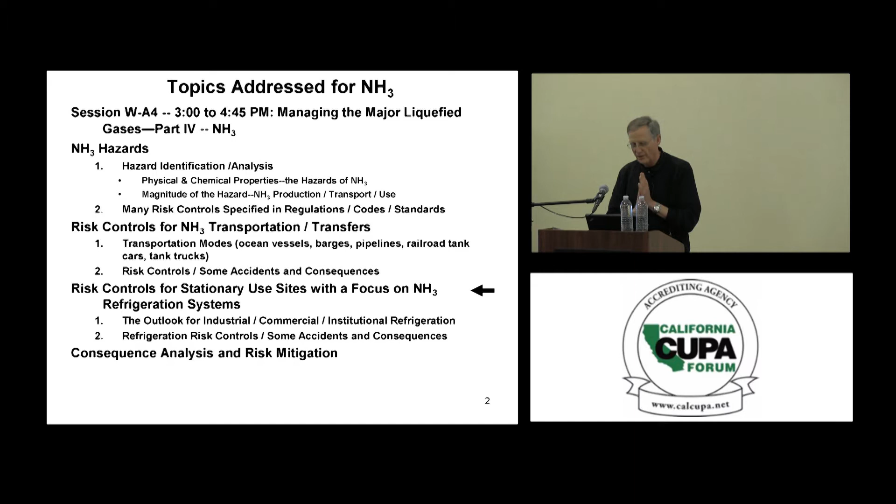For those others, we've talked about propane and chlorine. Ammonia is a very large tonnage, 135 million tons per year globally, about 16 in the U.S., fluctuates up and down. In the U.S., we are going to be back in the business of producing more ammonia here in the States. And why is that?

You want to volunteer the answer? Well, there's demand, but there's something else that has changed: feed gas. Feed gas being methane, which is how you make ammonia. You use methane as one of the key materials.

I am sorry, I thought I turned it on. So one of the reasons we're going to start producing more ammonia in the United States is because we've got a lot more methane, which is a key ingredient.

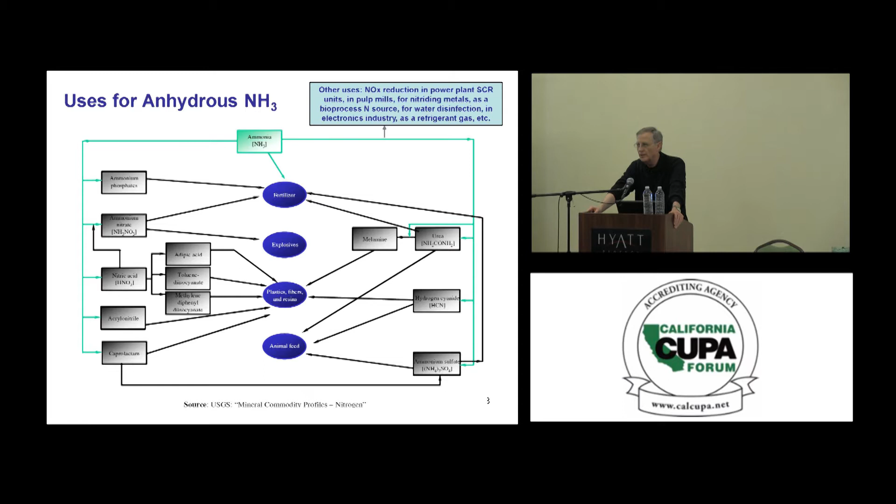We have been importing a lot of ammonia into the U.S. from low-cost producers of natural gas offshore, where they essentially had stranded gas. They had no other way to get rid of it other than producing another product, and ammonia was a shippable product that could be shipped much more easily than liquefied natural gas.

Ammonia has a number of characteristics, and I want to offer the advice I gave in the chlorine section: there are many industry associations that can provide a much better summary than I can of all the properties of ammonia and other gases. Here is one, the anhydrous ammonia training tour by TRANSCAER and the Fertilizer Institute, and I'll show a couple of clips. If you go online, look for TRANSCAER, the American Chemistry Council, the Fertilizer Institute. They give training courses on emergency response, as well as have a lot of online information about how to handle the risks associated with ammonia.

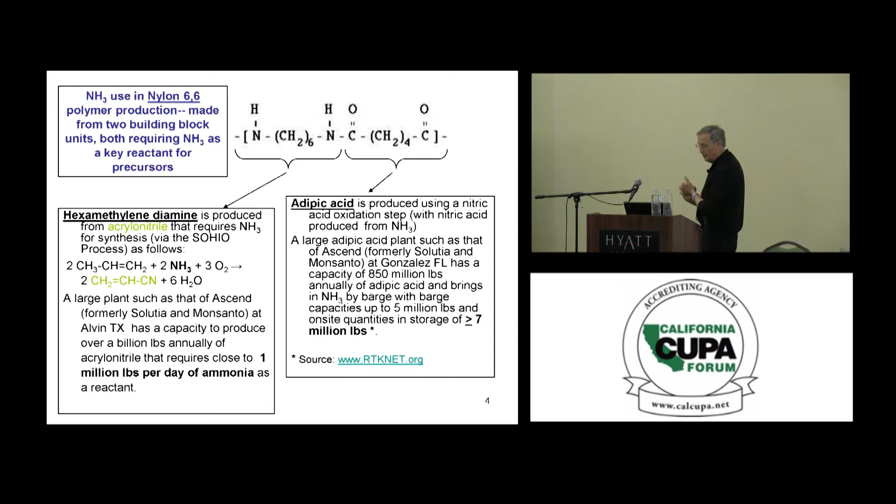In this discussion of ammonia today, I'm going to talk about hazards, risk controls in transportation, and like in the case for propane, ammonia gets transported by a lot of different means and in a wide variety of quantities depending on the transportation mode. Then we're going to talk about risk controls for stationary use sites, and about a lot of different ammonia uses, but we're going to focus on ammonia refrigeration because that is by far the largest single user, and certainly in California.

Commercial ammonia products - we talked a little bit in the last session about inherently safer approaches. There is some confusion at times when people talk about ammonia and aqua ammonia. Ammonia is anhydrous ammonia, and aqua ammonia is ammonium hydroxide. Commercial grade anhydrous ammonia is actually not completely dry, but it's pretty close, though it does have a certain level of moisture in it. Two common commercial grades of aqua ammonia are roughly 30% and a little under 20%.

There are great differences in the physical properties between anhydrous ammonia and aqua ammonia that have a very significant impact on the safety and use and storage between the two. So if there is an opportunity to cost-effectively - first it's got to be technically feasible, but then if it's cost effective - to use aqua ammonia, ammonium hydroxide, there are some real safety advantages in terms of risk management to using aqua ammonia instead of anhydrous ammonia.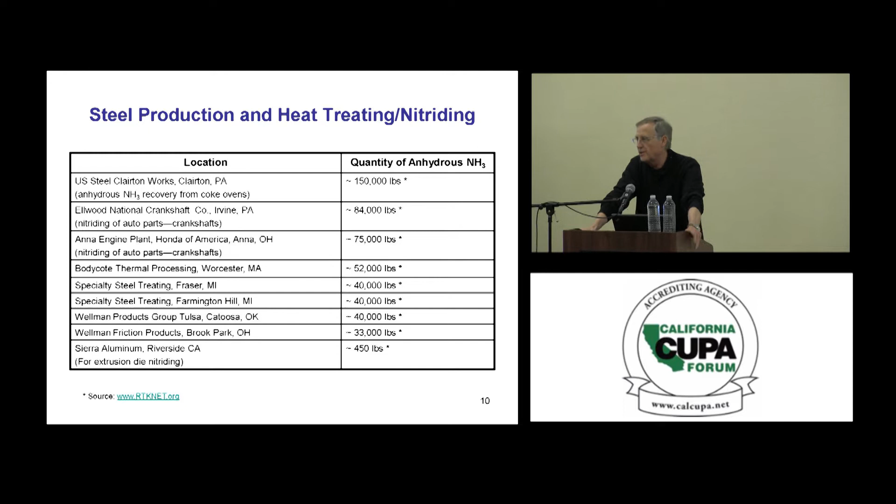Within a plume from a release from an ammonia refrigeration system, we're talking about in-plume concentrations that could easily be in the 50 to 150,000 part per million range. So going into an ammonia release plume can be very dangerous to your health.

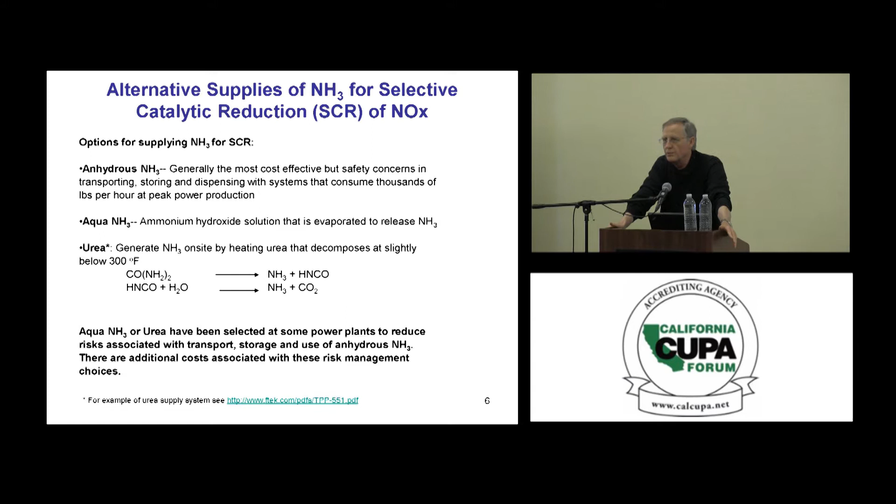Let's go back and talk about that number on vapor density, 0.6 relative to air. So you'd think ammonia is going to go up. Well, it will eventually, but as we'll talk about in the consequence modeling, it's not going to at first. It depends on how soon it's going to go up, where it's released, the conditions for release, the height, the pressure, the temperature, whether it's liquefied ammonia from an atmospheric storage tank or pressurized ammonia, and where it is in the system. If it's on the hot side or cold side of the system makes a big difference.

How many of you are with regulatory agencies, either Cal EPA, CUPA, etc.? Most of you, how many are in the audience? How many are here from a user of ammonia for ammonia refrigeration? One, two. Okay. Was that a hand in the back? Three? No, okay.

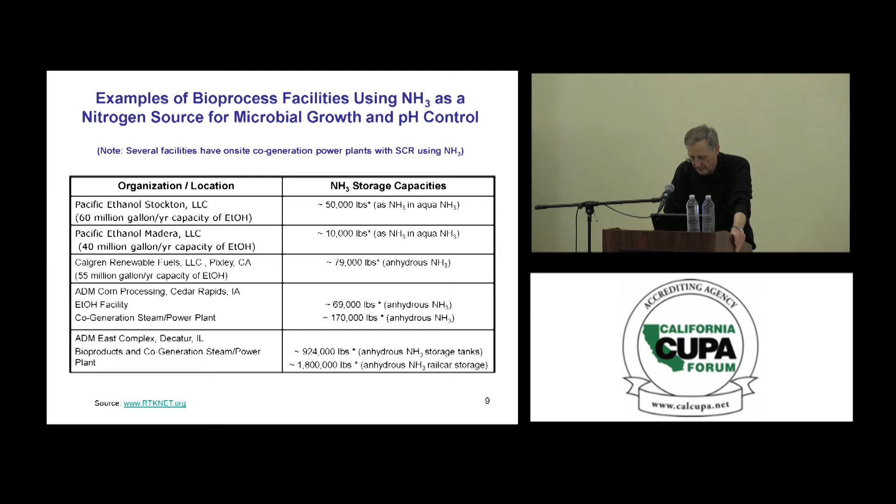So when you go by West Sacramento and look at those big tanks, or in Stockton, Port of Stockton, what are those in terms of ammonia? Does anyone know? There are some bullets, but there are also some atmospheric storage tanks that have a lot of ammonia in them.

And the big storage tanks operate at minus 28 degrees Fahrenheit. Why is that? Because it is much cheaper to store liquefied ammonia at atmospheric pressure in very large tonnage quantities. So those vessels are at minus 28 degrees Fahrenheit. We're going to talk about BLEVEs a little later, so remember that temperature in that vessel, it is at its atmospheric boiling point. That's the answer to the question I'm going to be asking you.

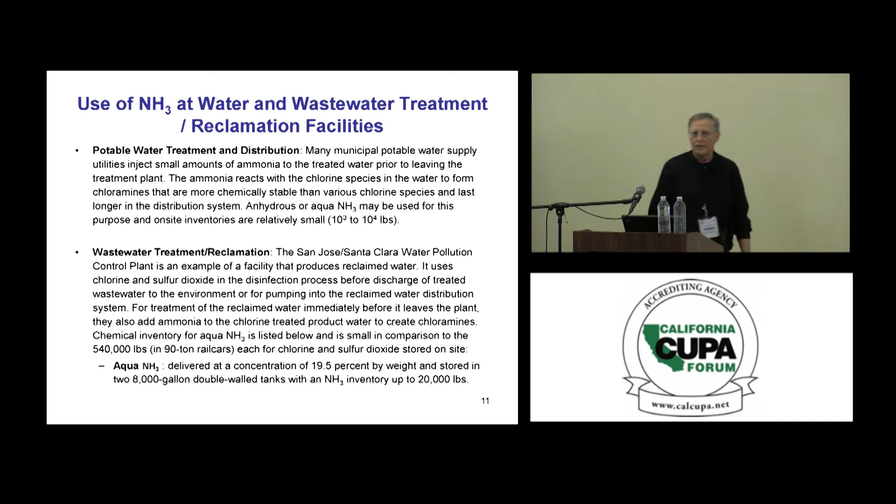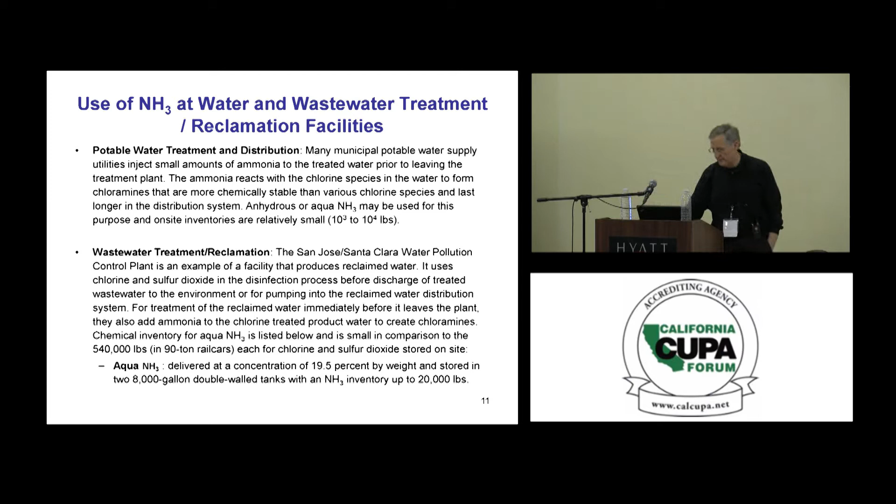If you spill aqua ammonia, there's much less of a cloud of ammonia gas formed, so you have much less off-site consequences compared to anhydrous ammonia. It's still not pleasant to be around 30% aqua ammonia, believe me, but it's a lot less of a hazard.

Now, BLEVEs: the ratio of how much gas volume there is to liquid volume if you have a sudden expansion. This is a rapid phase transfer. It's 850 to 1 for ammonia, so for every cubic foot of ammonia in that tank, you'll get 850 cubic feet of gas. If that expansion happens very quickly, it's called a boiling liquid expanding vapor explosion, and those are extremely hazardous.

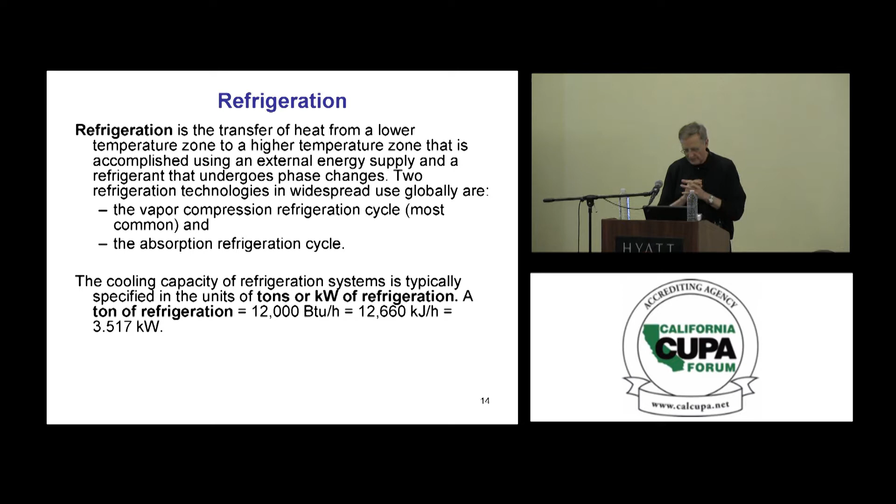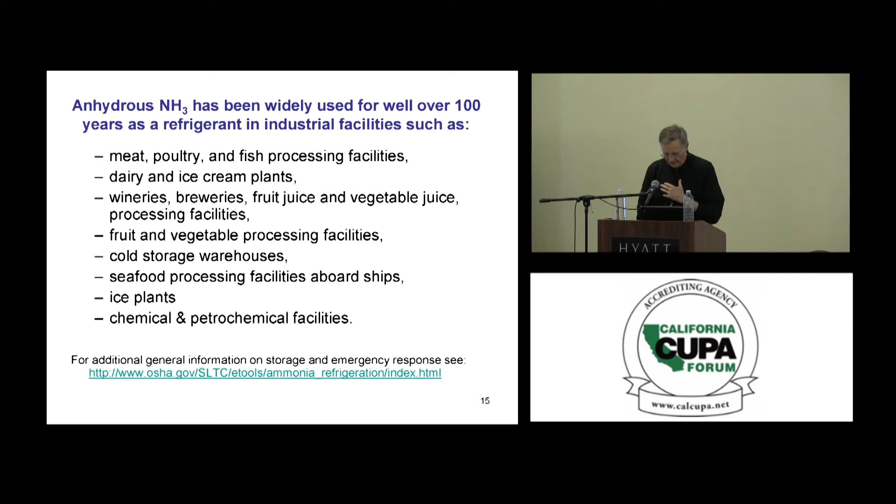One of the key properties that makes ammonia such a good refrigerant is a high latent heat of vaporization. Not as good as water, but it's good, 600 BTUs per pound, 6/10 of what it is for water. It has very good heat capacity too. But these small releases of ammonia from a refrigeration system, 1 pound of ammonia released can provide a significant volume to get up to a level where you could easily smell it.

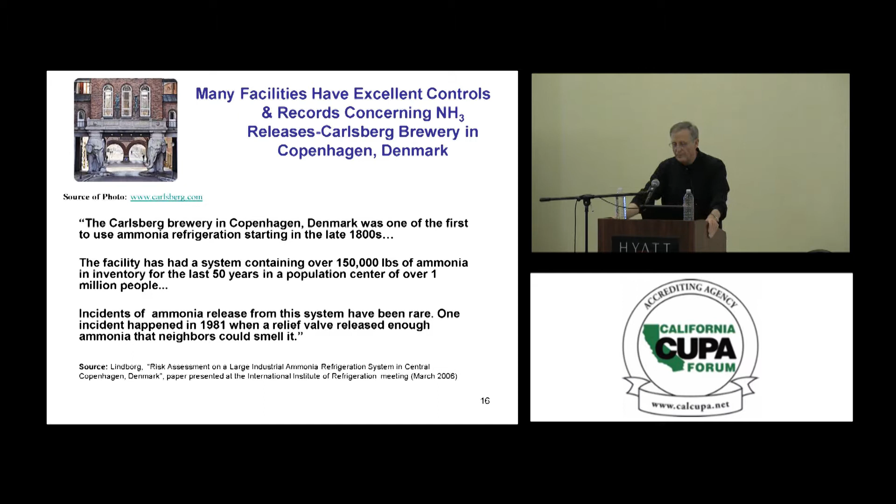So you discharge 100 pounds of ammonia out of your ammonia refrigeration system, out of your storage tank for distribution to on-farm use, and you can contaminate a gas volume of 90 million cubic feet to a concentration of 25 parts per million. That's 100 feet of air depth over 4 city blocks.

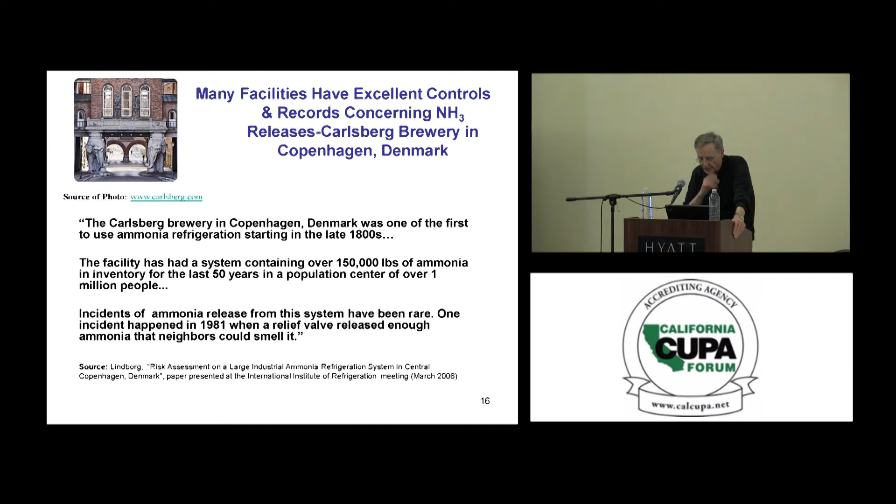Now, will that 25 parts per million hurt anyone? No. It will not be something people will enjoy, but 25 parts per million is the acceptable level for exposure for long-term work environments. Now, let's talk about another physical property of ammonia.

Ammonia has been considered as an alternative fuel, an alternative liquid fuel. I don't know how many people knew that. It's not a very good idea, in my opinion, because you have to get hydrogen from someplace, which typically comes from natural gas. Now, if you could generate the hydrogen from a nuclear power plant and then react it with nitrogen in the standard process, maybe you could make an argument, but I can't see that as being very cost effective.

But the point I want to make is ammonia will burn. Ammonia is an explosion hazard, but it's much less so than for the fuel gases, for a couple of good reasons. One is that most hydrocarbon gases have lower and upper explosion limits in the range of 2 up to maybe 13 or 14%. Ammonia's range is from 15% to almost 30%.

Also, minimum ignition energy: once you get a flammable mixture of a flammable gas such as methane, ethane, ethylene, propane, and so forth, the ignition energy is very low, 0.25 millijoules. The ignition energy to set off ammonia is 680 millijoules. This is the reason why in the fire code there are special provisions for not having certain electrical classifications, and some options when you have ammonia, since it's not treated as a flammable gas. The LEL I mentioned.

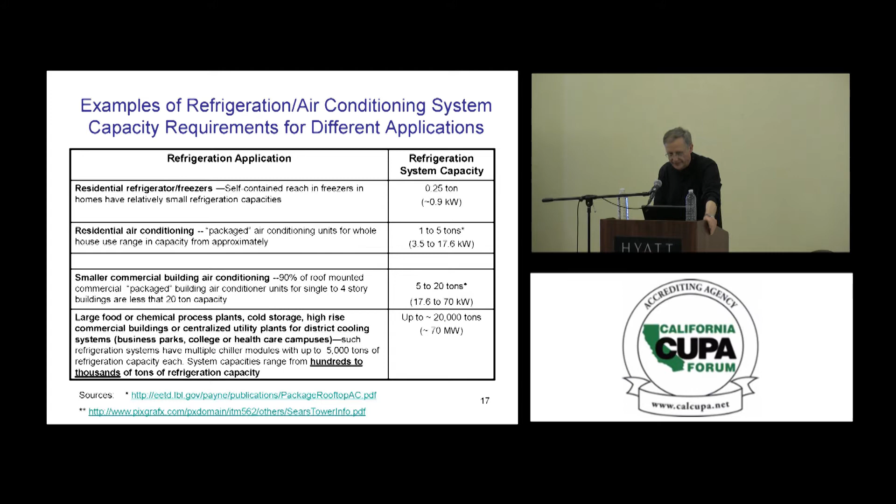Once we produce the ammonia, we have to transport it. Ammonia gets transported by many ways. It is a major item of commerce around the world and gets shipped by very large ocean-going vessels that go through under the Golden Gate.

On the west coast of the United States, there are 3 terminals. 2 of them are in California: one is the Port of Stockton, the other is the Port of West Sacramento, and the other is the Port of Portland, Oregon. They bring in huge amounts. The largest place in the United States for bringing in is the Port of Tampa, which has 3 very large terminals. So we'll talk about relative magnitude of the hazard in ammonia in a moment.

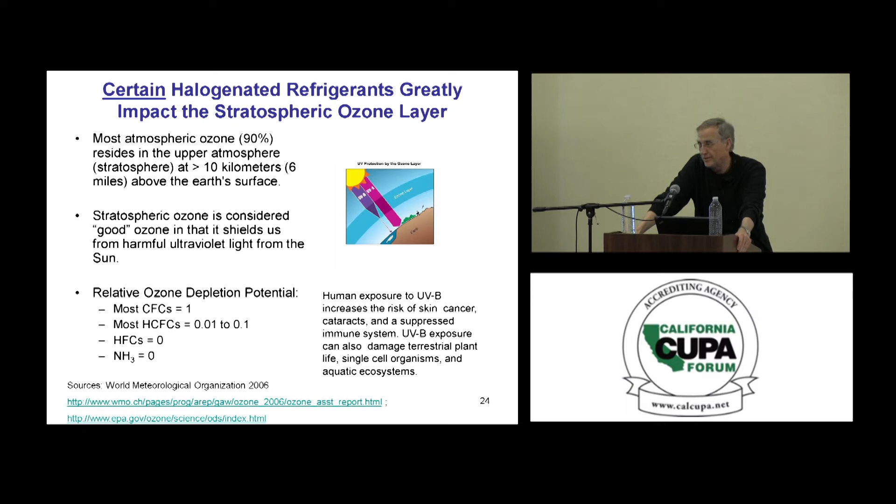Big number, big hazard, big risk exposure. When we talk about relative risks and the magnitude of the hazards, you have to look at quantities. Large bulk storage terminals typically are 10 to the 8th, 100 million pounds. Ammonia synthesis, often co-located with nitric acid plants, is 10 to the 7th to 10 to the 8th pounds, 10 to 100 million pounds. Large chemical plants converting ammonia to non-volatile fertilizers are 10 to the 6th to 10 to the 7th. Local distribution centers and small fertilizer plants are 10 to the 3rd to 1 million pounds.

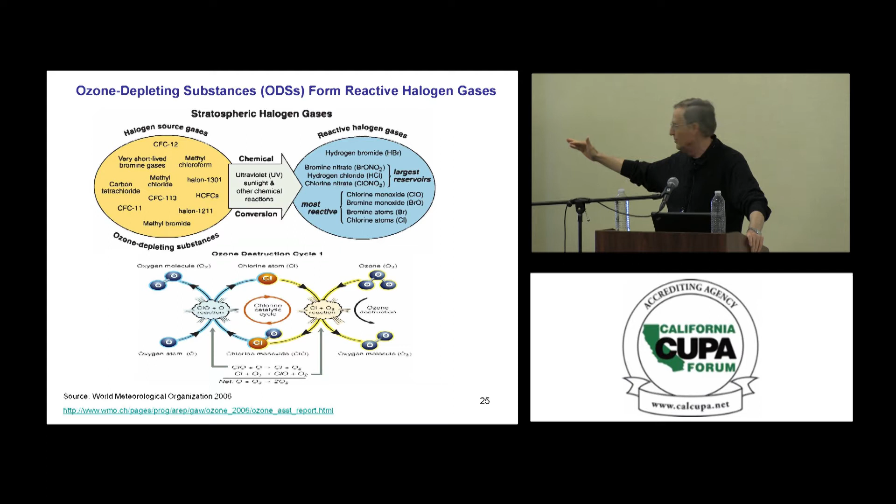The reason I'm making this point is this: as a society, as professionals in chemical, mechanical, and electrical engineering, and control systems, we have been able to do a very good job, for the most part, in controlling very large quantities of ammonia. So when you tell me that you have a system in California with 500 pounds of ammonia, does that tell me that's trivial? It does not—that is still a significant risk exposure, perhaps. But what it does tell me is that we have a lot of experience handling many orders of magnitude. These aren't just factors, these are orders of magnitude, orders of 10. So we've got a lot of experience to leverage to manage ammonia risks very successfully.

How is ammonia transported? Ammonia is transported across the U.S. by a number of means. There are a lot of import terminals, and historically the sources of cheap natural gas have been the Gulf Coast of the United States, where most of the ammonia production has occurred.

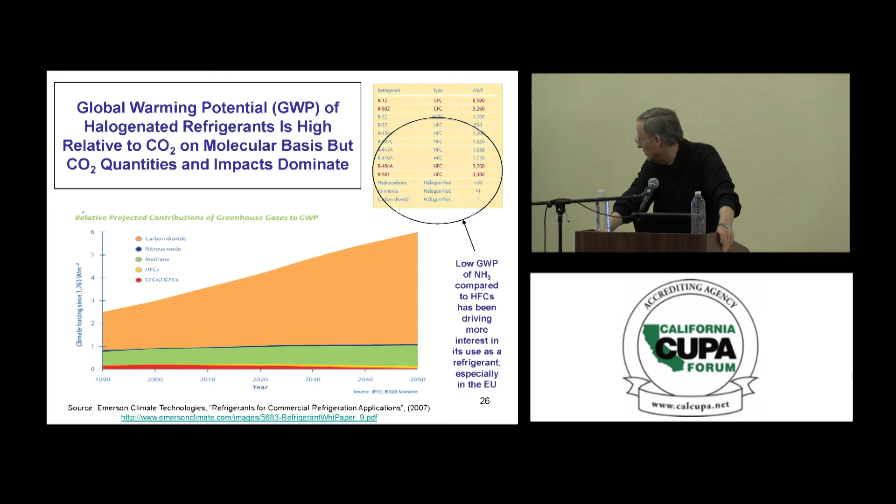It's also occurred along natural gas pipelines when natural gas prices were relatively low. There are numerous ammonia pipelines connected to port terminals. Ammonia moves by pipeline, by river barge, by rail cars, as well as big tankers that go into ports on the Gulf Coast, into Tampa Bay, into the port of Portland, Oregon, or around West Sacramento. It also gets moved by small tank trucks and small tanks called nurse tanks.

I'm going to talk about accidents that have happened at all the different levels across the supply chain. I usually give this talk to people from all over the country, so it's not specific to California, but I'll try to pull out examples where I can for California.

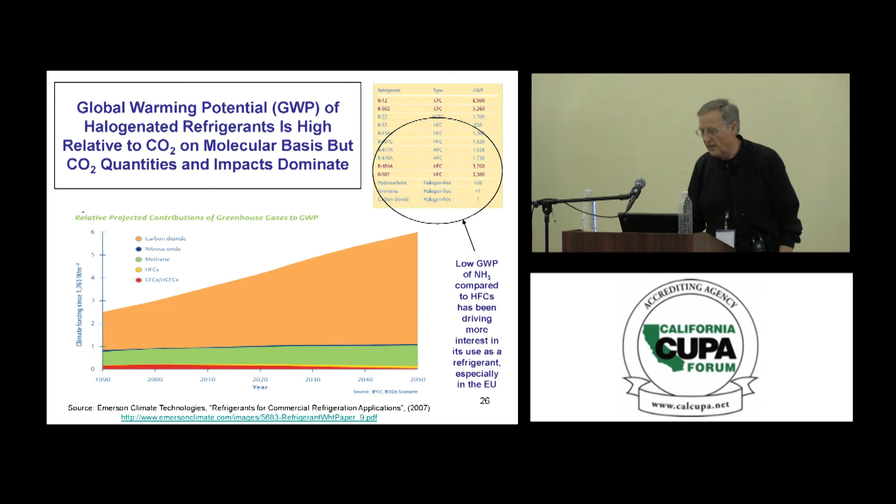Let's talk about some historical data on ammonia releases in 15 states. During a 5-6 year period from 1993 to 1998, there was a paper published on the number of releases that appeared in the Journal of Occupational and Environmental Medicine in 2003. I used this data when doing a risk assessment for one ammonia use system, trying to get a feel for the probabilities of failures of different systems.

So the bottom line, let me read a couple of these statistics. A total of 2,020 ammonia releases were reported in 15 states. A median amount of ammonia released was 200. 248 of these events, 12%, led to injuries to employees, first responders, or the public. 12% - not a big portion, right?

85% of the events with injuries were injuries to employees or first responders only. Remember, I said they tend to be on-site more than off-site. However, 50 to 60% of all injuries reported were to the public.

Now, what was the extent of those injuries? In very rare cases, those were fatalities. In many cases, they were reported because people went to the emergency room because they smelled ammonia, they knew they'd been exposed, and it frightened them. They had very few symptoms other than smelling ammonia, or they may have gotten a little short of breath because they were agitated or upset that something undesirable may be happening to them. But the event was a non-event in terms of real physiological harm or damage.

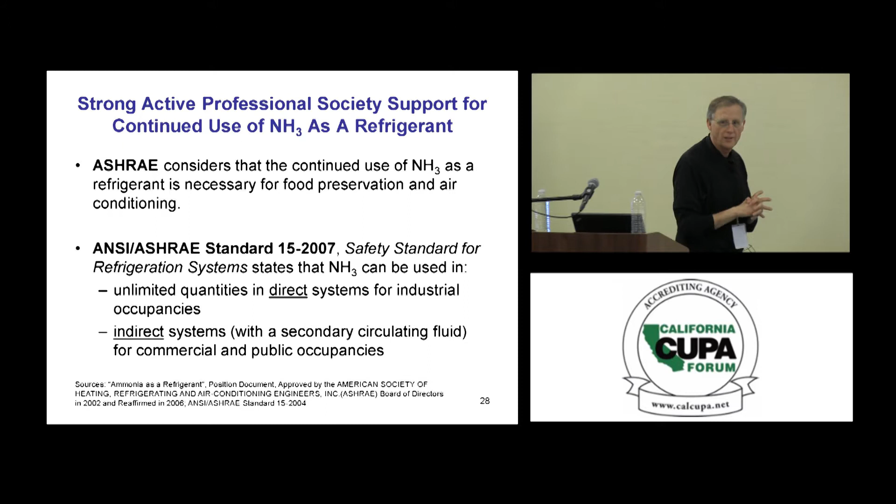However, there were 13 fatalities reported - 8 employees working at the sites, 4 first responders, 1 member of the public. So over that time period, one person, as far as I could find data, had been killed off-site by an ammonia release. More people had been killed by lightning, and many more killed in automobile accidents and so forth.

But that's not a good way to explain risk to the public. Of those 2,020 events, 88% were from fixed sources, non-transportation. 78% of the events at fixed facilities were attributed to equipment failures, and 12% to human error. I'm surprised - it's usually the reverse. Those equipment failures, though, were probably related to human errors, people not doing preventive maintenance on schedule, which is a management system failure, a failure of humans to manage the risk. 270 of these food industry events led to evacuations.

Now let's talk about some incidents. 2009, Louisville fire chief - hazmat crew responded to the scene and determined there was an active anhydrous ammonia leak in a building. Two seriously injured victims were identified: a gentleman named Damon Shanks and Robert Corbin, 59. The coroner said both died due to exposure to anhydrous ammonia gas. This was a cold storage facility. The point I want to make is these events are infrequent, but they still happen, and they happen all too frequently given that we should have learned from these events in the past.

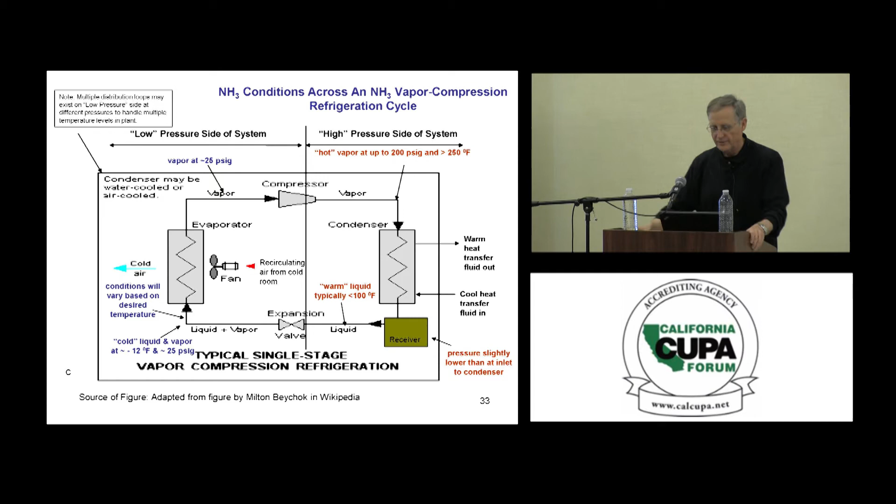However, we still have looked at a lot of different candidates to replace ammonia. And it's very interesting, in the space program, what did they decide to use for refrigerant gas? Ammonia.

Ammonia is recognized as an acceptable refrigerant by the US EPA under the SNAP program, Significant New Alternatives Policy, to get rid of CFCs and HCFCs. Now, since I think everyone in here is familiar with why we're moving away from CFCs and HCFCs, I'm going to very quickly move through that part when we get there.

Now, one of the other aspects of possible substitutions: chemical transformations used to reduce hazards and risk are available for anhydrous ammonia. So you can use aqueous ammonia for the introduction of ammonia into the fields. You can also convert it to urea, or you can make ammonium nitrate. No good deed goes unpunished. Aren't there some problems with potentially getting ammonium nitrate into the hands of the wrong people? Very big risk exposure, but it solves a problem about releasing a toxic gas.

Power plant stack gas NOx control. Remember I mentioned that while we call nitrogen an inert gas, nitrogen is truly not inert. Several slides back, I showed you a diagram that showed hydrogen reacting with nitrogen in a catalytic process to produce something called ammonia. So nitrogen's not inert, but it takes a lot of doing to get it to react: high temperature, high pressure conditions with a catalyst to react with hydrogen to produce ammonia.

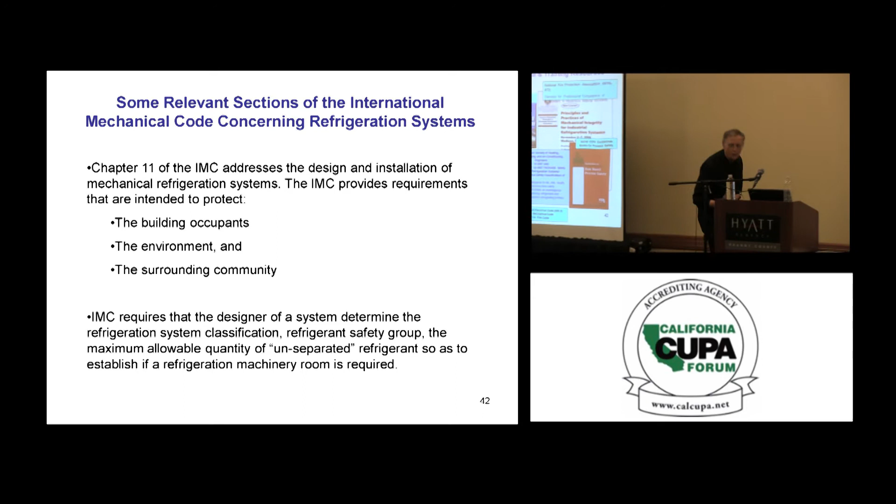So there are a lot of tools out there that you can go to, and that folks in your jurisdictions can go to, to get advice and best practices. I've also shown the Wisconsin group that gives a course every year on principles and practices of mechanical integrity for industrial refrigeration systems, which is where I sent engineers who worked for me when we were evaluating installation of new refrigeration systems. These are areas where you can get a lot of good information, and as regulators, that may be a good place for someone in your organization to go as well, so you have the latest information.

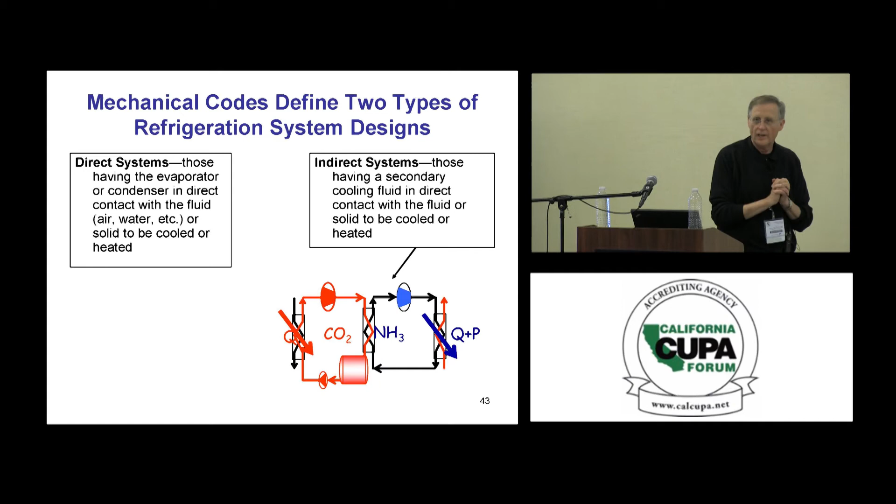Now, what is the expectation on owner-operators? The expectation by federal OSHA, at least, and I cannot imagine it is not the expectation of Cal EPA and Cal OSHA as well, is that companies will comply not only with regulations but with industry best practices. I'm not going to read the whole list, but there are a lot of these best practices out there that are needed to run a system that handles anhydrous ammonia.

Hi, I'm Mike. What I want to do is, I now remember what I was supposed to do. I want to show you a little bit of this.

Hi, I'm Mike Callan, and welcome to the TRANSCAER Anhydrous Ammonia Tour. I'll be your host and guide for this training program. To give you a bit of my background, I was a career captain in the Wallingford, Connecticut Fire Department for 20 years, and have been responding to hazardous incidents and training emergency responders for almost 40 years, even before there were placards. I'm also the author of several hazardous materials emergency response guides and was part of the training development teams for propane and the pipeline industry.

What I've learned from my experiences is that in order to respond safely and effectively to hazardous incidents, you need education, information, and support. One of the most valuable resources you have available is TRANSCAER. TRANSCAER is a voluntary national outreach effort that focuses on assisting communities to prepare for and respond to a possible hazardous materials transportation incident. TRANSCAER members consist of voluntary representatives from chemical manufacturing, transportation, distribution, and emergency response industries, as well as the government. TRANSCAER promotes safe transportation and handling of hazardous materials, educates and assists communities near major transportation routes about hazardous materials, and aids community emergency response planning for hazardous materials transportation incidents.

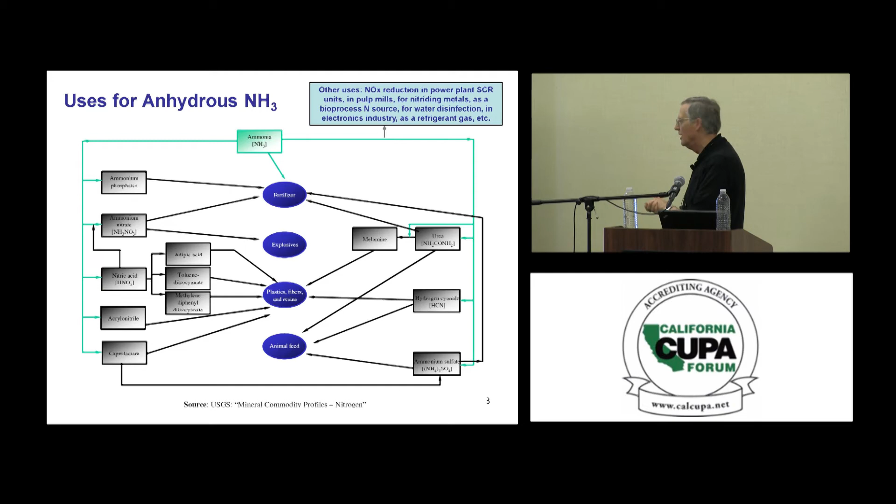Now, in the second part of this, we're going to talk about transport accidents and transfer accidents. And I'm going to talk about where some of the events have happened and how they've happened in terms of containment vessel failures, valve failures, get into issues of transfer accidents from transport equipment for loading or unloading, and again, look at management system failures.

And this is a slide that you already saw, just going over, and I'm going to walk through now some of these different approaches and talk about frequency as the first thing. So one of the things that will determine the risk exposure, in part, is the frequency something is done.

It's also the quantity. So the mode of transport, ocean tankers transport quantities in tons per year of 5 to 6 million, approximately 500 deliveries per year would be expected. For barges, 1.5 to 2 million, greater than 650 deliveries per year of barges. With railroad tank cars, 4 million tons, and at the average quantity transported represents over 50,000 railroad tank car deliveries.

Tank trucks, about 4 million. So compared to chlorine, we've got a lot more material moving by tank trucks with ammonia than we do in the case of chlorine. We've also, with both, we've got a lot of railroad tank car deliveries. And then nurse tanks, at 4 million tons, there are an awful lot of nurse tanks being used, filled and refilled after they've been emptied in the field.

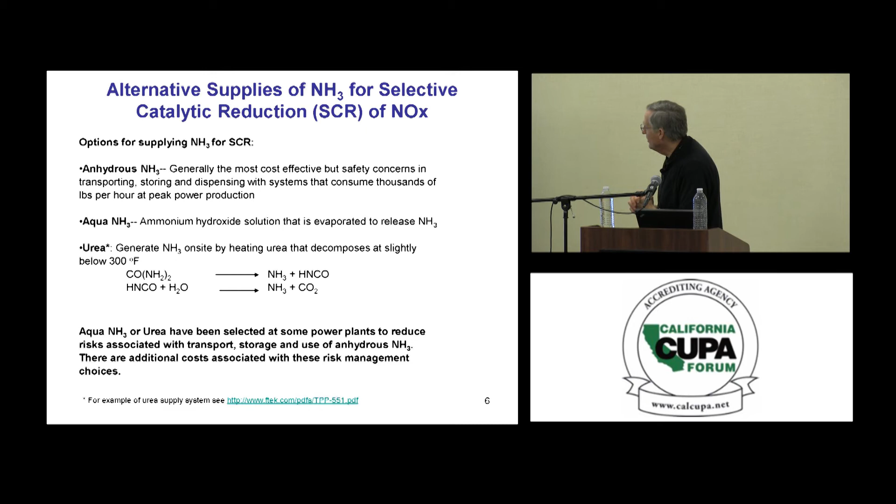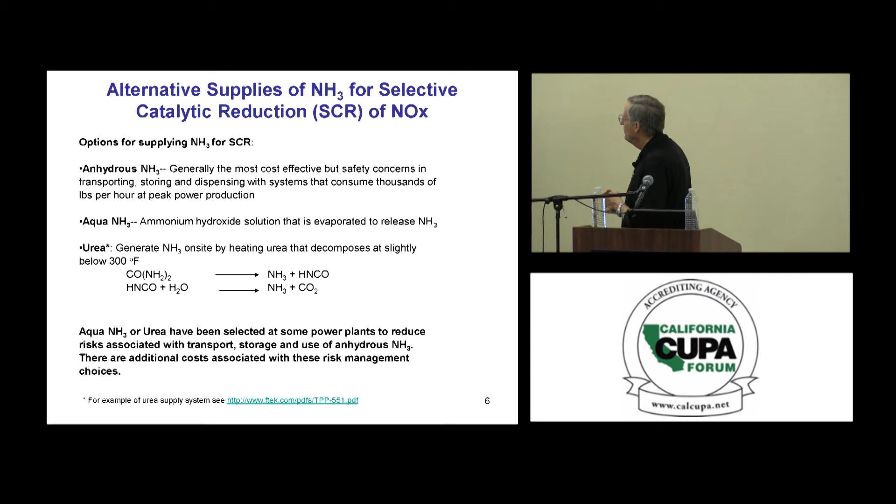When I talked about propane, ammonia and propane (LPG, liquefied petroleum gas) are often transported in the same ocean-going transport vessels. When you think about the potential consequences of an event for risk management plans, the scenario where we may lose the total contents of the ammonia storage tank and refrigeration system has 15 or 20,000 pounds, that's a lot less than the 250 million pounds that's in Tampa Bay.

On the West Coast, these are the numbers. Agrium, West Sacramento, is about 80 million. California Ammonia Company is about 80 million, and Simplot up in Portland is about 100 million. So these are very different scenarios.

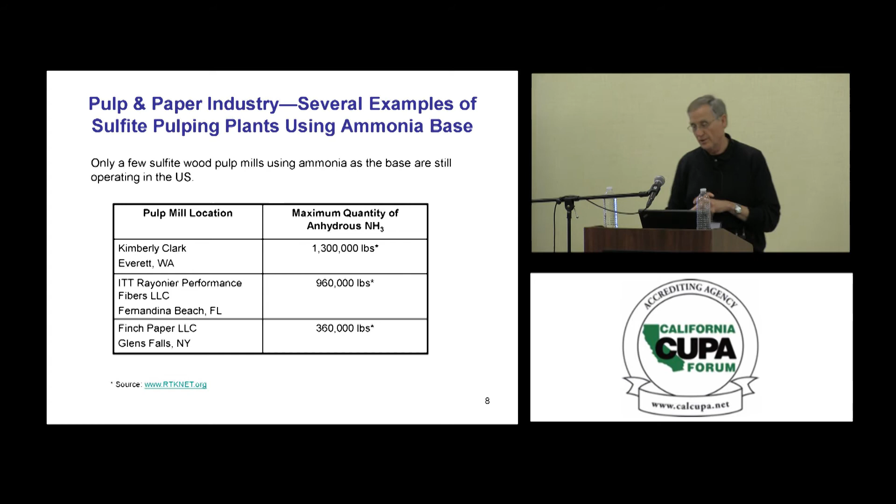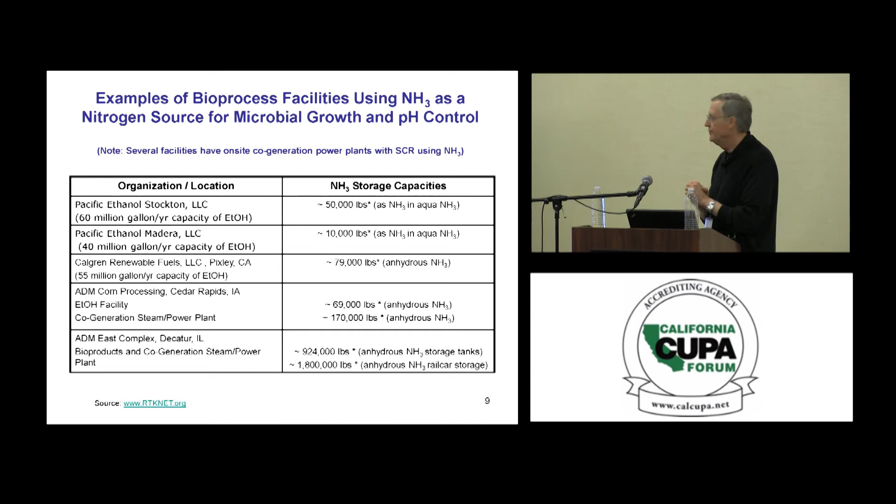Bulk deliveries of anhydrous ammonia in the port of Stockton may equal or exceed 10,000 metric tons, or 22 million pounds per delivery. What county is Stockton in? San Joaquin. Anybody here from that county?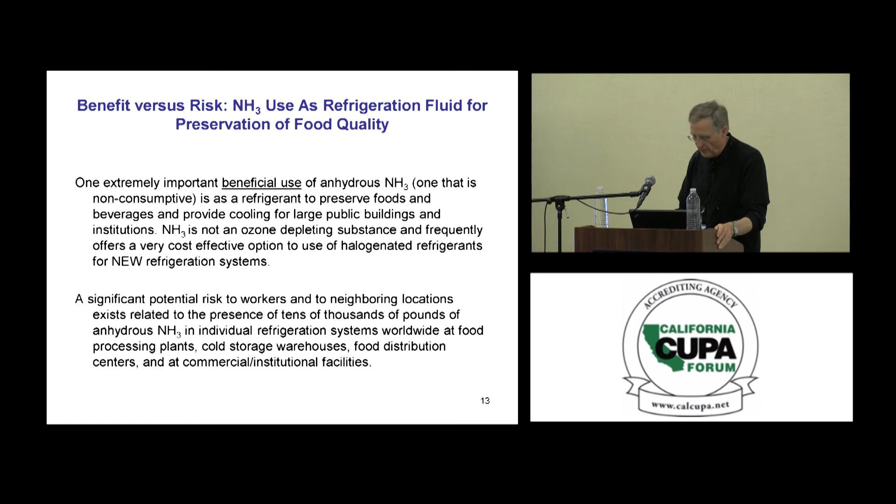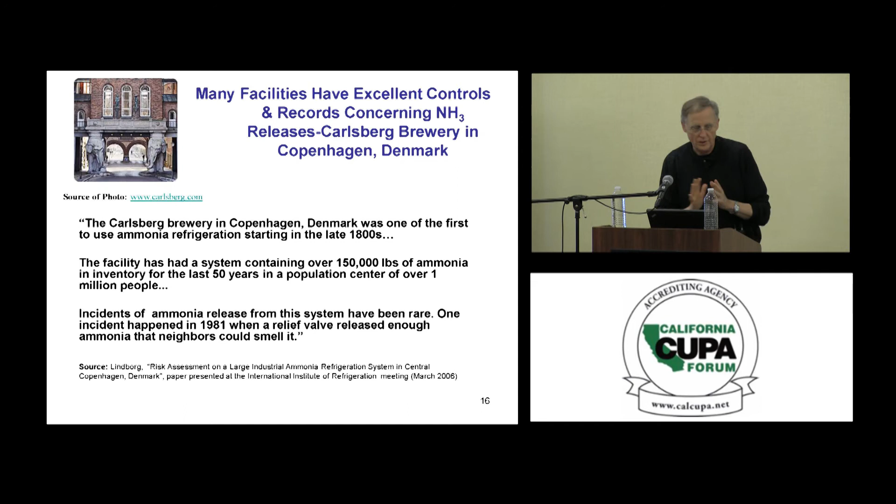Now, what contributed to the magnitude of this incident? Remember I mentioned, for those of you who were here, the propane and Pemex disaster where over 600 people were killed outside of Mexico City in the 80s. These folks had the same problem in terms of responding. They saw a change in the pressure on the line, and they had not drilled on that particular scenario, so they didn't immediately shut down the line and kept pumping. The consequences would have been much less if the operators had responded appropriately and turned off the pumping to reduce the pressure on the line and stop the flow.

Land transport is DOT required. Anhydrous ammonia is regulated by DOT as a hazardous material.

Question: On that pipeline, do they segment off different locations where they can actually shut it off? Yes. Is that how it works? Maybe not enough. And more often in the future, as we unfortunately know, at San Bruno, California, there weren't enough shutoffs, and they weren't done fast enough. What's one of the reasons that pipelines don't get shut down fast enough?

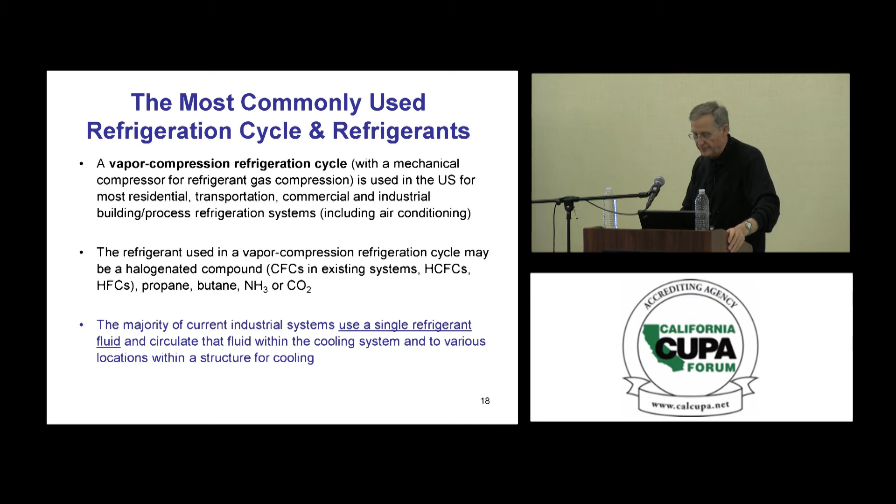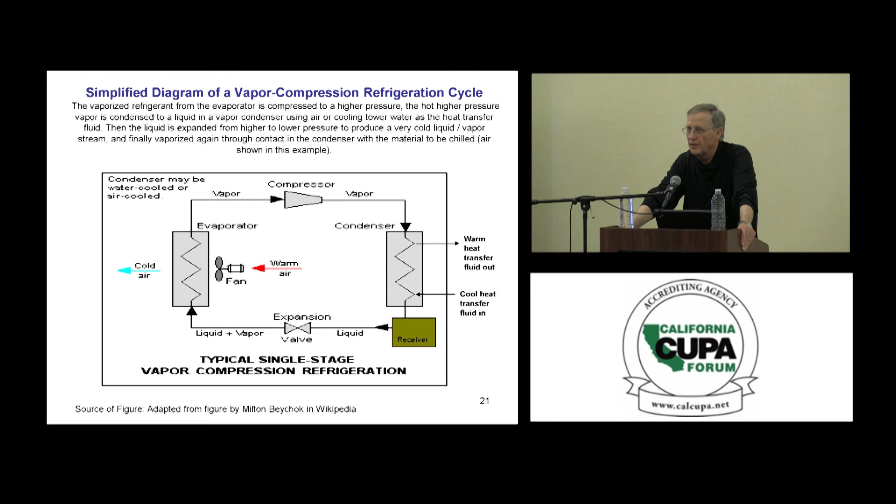Now, when you are withdrawing product from these tanks, if you have a restricted line flow, the maximum possible flow may be below the point where these valves will shut off, so the valves won't do you any good in terms of shutting off the flow. That's the reason auxiliary controls - another layer of protection in addition to what's on the tank car - are often used. And they generally work, but not always.

I've already talked about BLEVEs, so I'm not going to talk about that more here.

Now, let's talk about some specific incidents. We've had a lot of things happen in terms of better design since the Kingman, Arizona BLEVE with the propane tank, and we've got tanks that are much better able to survive incidents.

Here's a situation from February 2001 in Red Deer, Alberta, Canada. More than 70 metric tons of anhydrous ammonia was released from a railroad tank car that overturned. 34 people went to the hospital, and one individual died while crossing the railroad right-of-way.

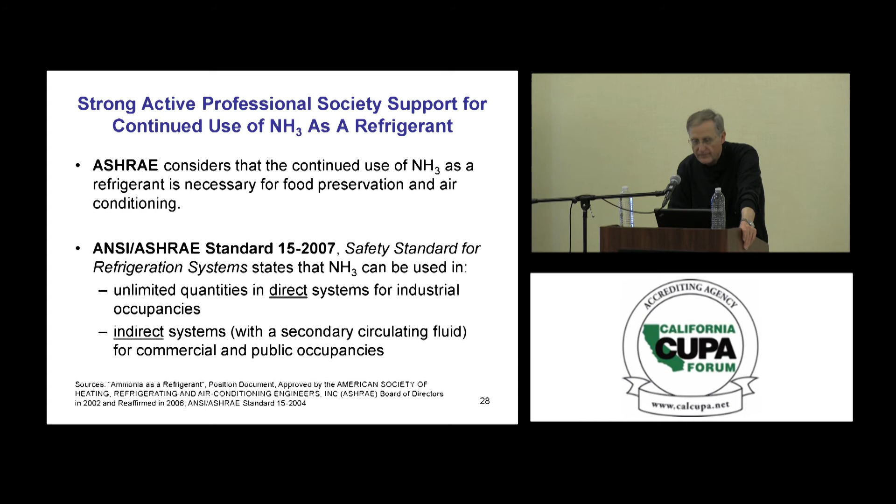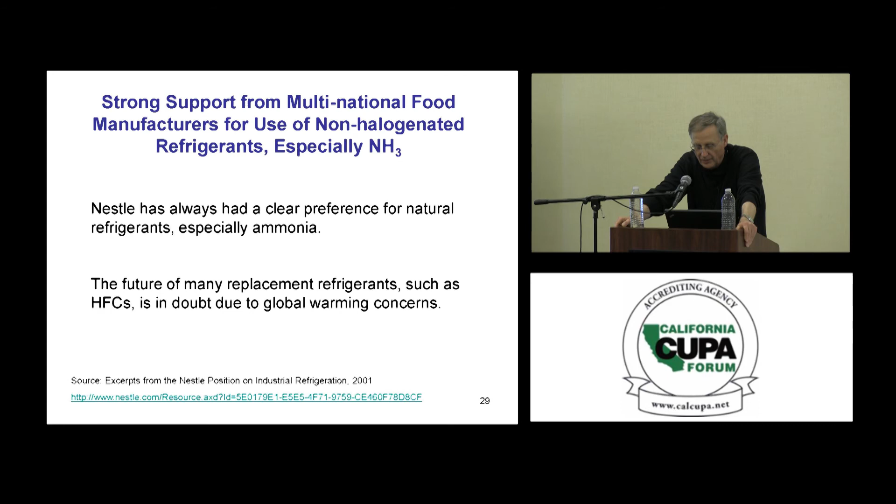This was a particularly serious event. About 12,000 people lived in the area. Only one person was fatally injured. 5 tank cars ruptured, releasing 146,700 gallons of ammonia initially, and another 74,000 - over 1 million pounds of ammonia got released in this incident. It's lucky it was in Minot, North Dakota, which only had that population. It's very lucky that only 322 people sustained minor injuries and only 11 serious.

2 of the derailed cars were each filled with 24,000 gallons, 120,000 pounds of ammonia. Does this remind you of the incident I mentioned where the car went for a joyride outside of Las Vegas for 20 miles before it was finally stopped because it was a runaway railroad tank car?

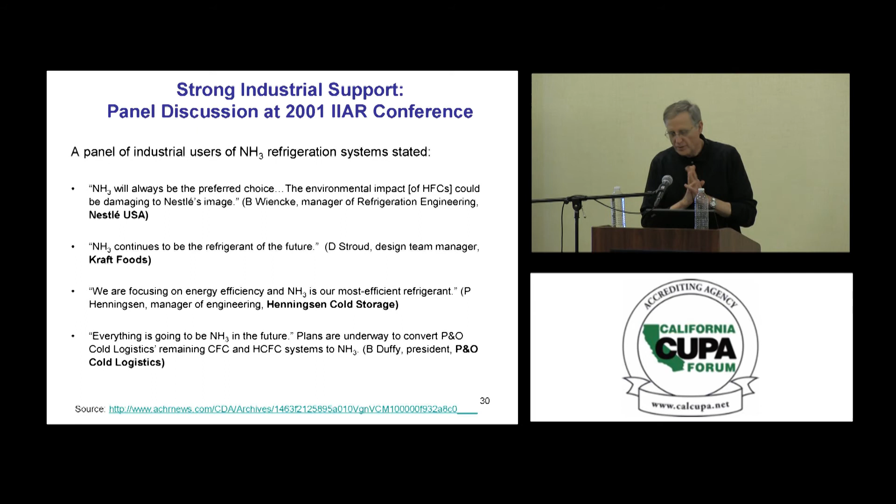Now let's talk about how things can go wrong, even for companies like the one I described that did a lot of the right things with trying to manage their chlorine risk, putting automatic shut-off devices and detection devices in place. This is an incident that happened in France in 1994. This was a facility for unloading ammonia tank cars, and they had a sudden, unexpected, unjustified automatic disconnection of the liquid and vapor lines to the tank cars.

These automatic disconnections often would happen - the systems are put in place so that in case another rail car comes along and bumps a car while it's being loaded or unloaded, they will automatically disconnect and the shutoff valves will close immediately. You'll lose some material that's in the line, but the spill will be relatively minor. So again, what kind of safeguard is this? You've lost containment, but you mitigate the measure by making certain it's a small amount.

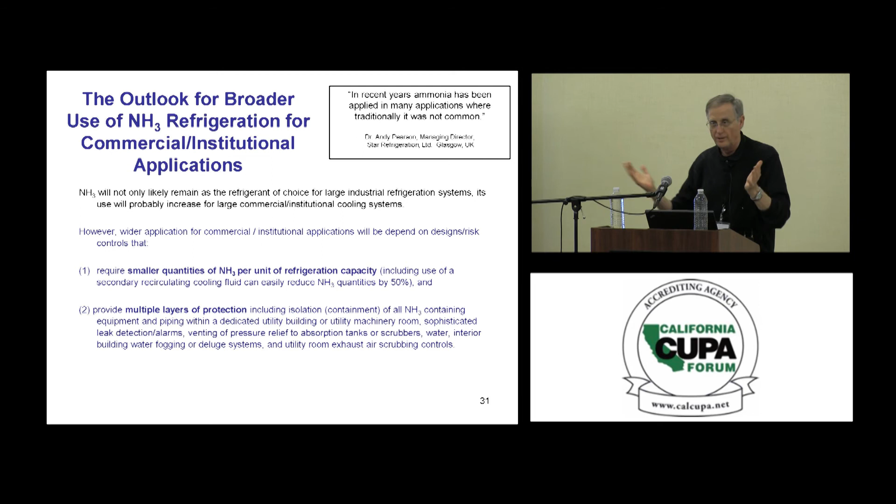Now, what happened here? Failure of the closure mechanism for the valves on the tank car. So they've got a great system in place. And so what did I tell you? There are 4 steps in risk management. You've got to know what your hazards are. You then have to know what the risks those hazards present are. You have to assess those risks to see if they're tolerable and decide if you're going to put more controls in. You have to make certain you know what all those controls are, communicate them, and then you have to inspect, test, calibrate, and maintain to make certain that those risk management controls perform on demand.

And again, that's not what happened here. Consequences and some lessons learned: the result of this event was a release of 27 metric tons, almost 60,000 pounds, at an average rate of 1,500 pounds per minute. Fortunately, there were no serious injuries during a 4-hour response involving warning of the release and advisories to shelter in place.

A serious accident is always possible even where there appears to be a sufficient number of redundant controls, level of protection. Checks must be performed following maintenance, counting of parts. What happened here? Well, what happened here was that they had something left over after they did the maintenance. There was a bolt that somehow didn't get put back where it was supposed to, that ended up in the shutoff valve, and the valve wouldn't shut off.

Conduct of operations, operating discipline. Cargo tank trucks typically have over 3,500 gallons of capacity, and they're all DOT-rated vessels. So, what could go wrong here?

They've got a lot of codes. 100% X-ray of all pressure welds is required. Stress relief per ASME code. Wet magnetic particle inspection — all sorts of standards have to be met.

So I talked about a levee, and I mentioned that there are mechanical damage to a vessel can cause a BLEVE. So this is the example.

National Transportation Safety Board report of an incident in Houston, Texas, 1976. The front end of the tank separated from the main body of the tank, and this permitted a sudden and rapid, complete release of the entire contents of the anhydrous ammonia vessel. The left side of the tank was scraped as the front of the tank was dragged along the outboard surface of the ramp. The driver took a turn too quickly on a ramp off the interstate highway, going onto an overpass. The tank failure was probably initiated at the point on the shell to head weld where scrapes had reduced the thickness of the tank shell.

The front head separated from the shell, and the escaping gas propelled the tractor cab into and around the column and onto the median of the roadway. After the front head separated, the forward and center transverse baffles were blown out of the tank. The remainder of the tank was propelled rear end first into a second ramp support column.

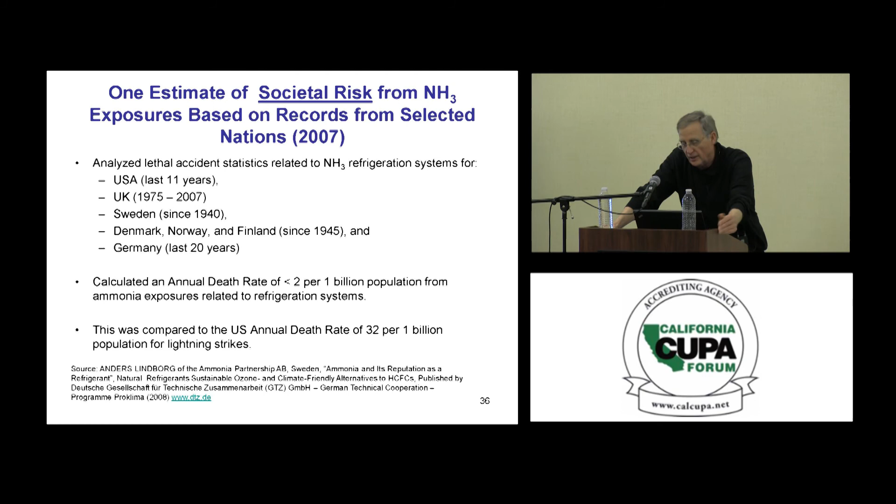You know those scenarios you have to do for CalARP with catastrophic failure of a vessel, and all of us say they can never happen? That's an overstatement. Maybe that's true for a stationary tank, but here's a catastrophic failure of a tank. It catastrophically failed and almost instantaneously released 38,000 pounds of anhydrous ammonia, blocking the freeway.

The plume stretched more than a half mile. By the way, that plume in Minot, North Dakota was miles long — 1,970 feet long, 1,150 feet wide. 6 people died, 5 from inhaling ammonia right on the freeway, trying to get out of the plume.

So when we get into consequence modeling, how many of you have used ALOHA models as part of your activities? They're not perfect, but they're very useful to help in consequence analysis. What else can happen in terms of causing a BLEVE or leak? And not all leaks will become BLEVEs.

This is an example of an incident that happened in Middletown, Ohio in 2003. AmeriGas, an MC331 tank, manufactured in 1977. The front head failed from intergranular fracture in the carbon steel and began to leak. Failure was deemed typical of stress corrosion cracking, caused by hauling ammonia with too low a water content, below the 0.2 authorized per Title 49.

So remember I said anhydrous ammonia is not completely anhydrous — there's a reason for that. Complying with standards is important. Luckily, this wasn't a catastrophic failure.

Ammonia terminals — this doesn't apply to us in California because we don't have river terminals or pipeline terminals. These terminals store very large quantities of ammonia under low temperature conditions, although they also have on-site bullet tanks. This particular facility in Minnesota had 2 refrigerated tanks with a storage capacity of 60,000 tons, or 120 million pounds, and they also had a bullet tank. The site was the scene of a fatal accident — again, a tank transfer. A 31-year-old truck driver was involved in truck filling, and they had a misconnection and failure, leak of anhydrous ammonia. Flow was stopped, but someone was killed.

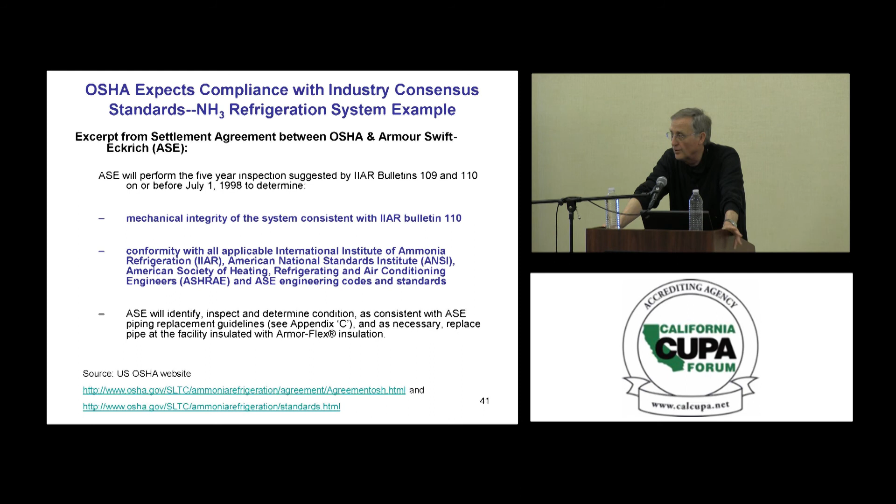7,000 pounds of anhydrous ammonia leaked out of a tanker truck in South Carolina when the tanker truck was unloading anhydrous ammonia at an ammonia distribution facility, probably for agricultural use or for ammonia refrigeration systems. She was going to work. She drove into the cloud. Her car probably stalled, she got out of the car. An ammonia cloud can have concentrations of between 10,000 and 100,000 parts per million — lethal concentrations. She didn't make it out of that cloud.

Nurse tanks. There are a lot of them around. Do they ever fail? Unfortunately, yes.

A representative of the Fertilizer Institute estimated that in 2004, there were probably 200,000 nurse tanks across the United States. Those tanks delivered about 4 million short tons of ammonia. That's a lot of different transfers every year.

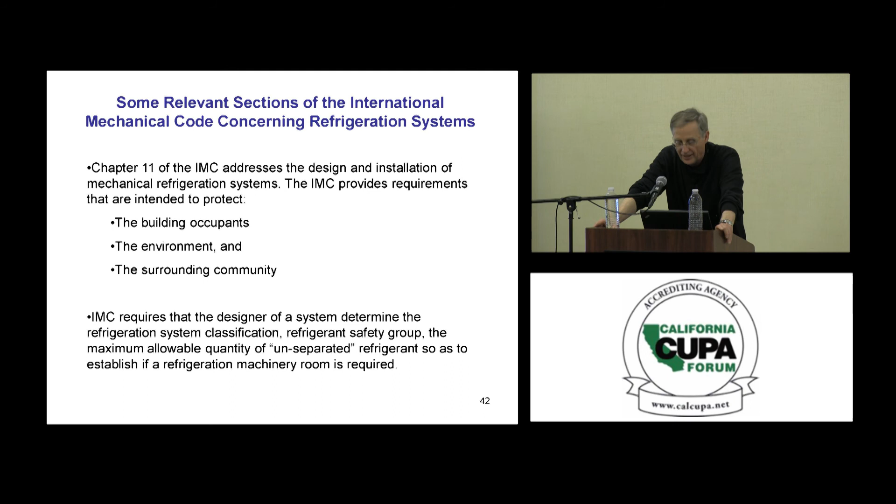I'll let you look at these slides at your leisure. You can see the different features in terms of how they're set up, the different safety controls and valves, and color coding and so forth. This is typically also included in some of these TRANSCAER trainings - they'll provide training on how to respond to and understand how nurse tanks are set up and how first responders can respond to mitigate the incident. So I'm going to skip over some of that and get to a failure.

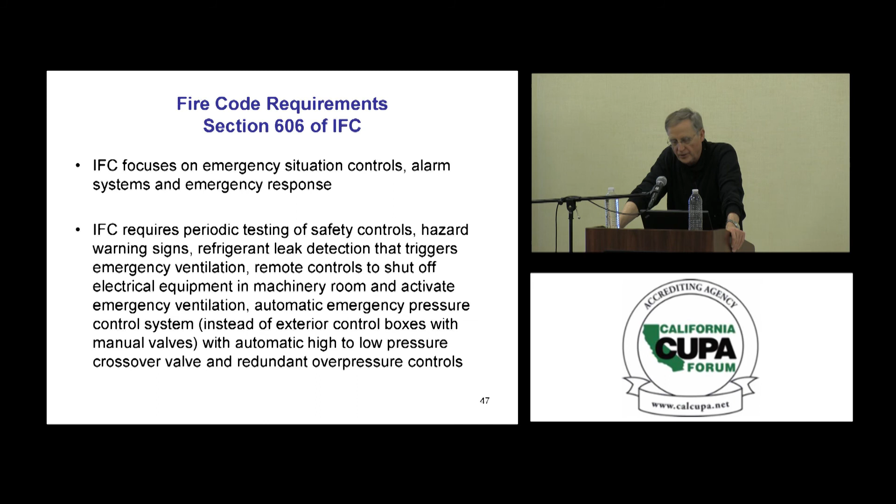Both nurse tank loaders suffered chemical burns over more than 50% of their body, eye injuries, airway injuries. The loader who had been on the loading platform when the tank fracture occurred died as a result of inhalation injuries.

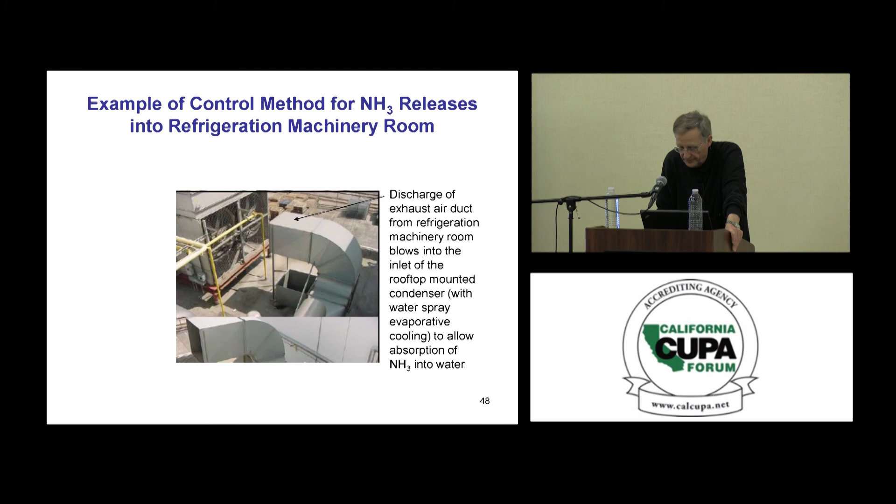A portion of the rear head was lying near the filling dock. The remainder of the tank was approximately 100 yards away. No employees or customers were at the site. No fatalities occurred - lucky.

So, those are some examples of what can happen in this supply chain in terms of transportation. Let's keep going down - we're getting near the end.

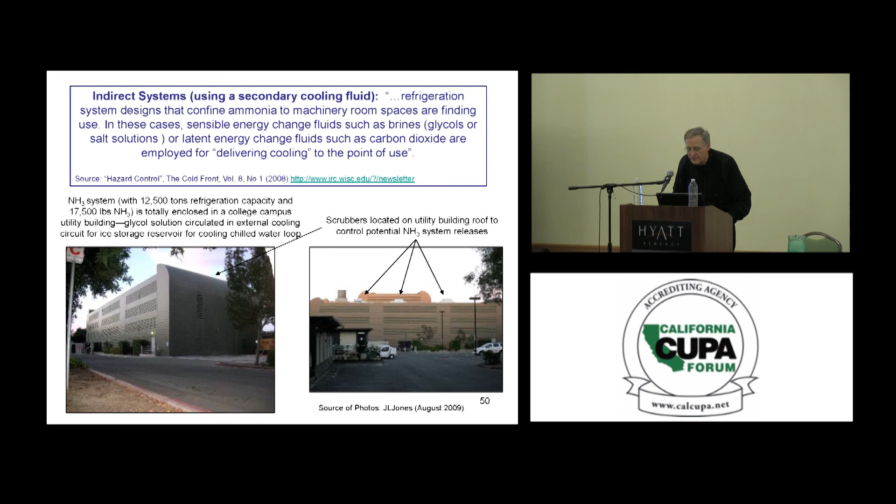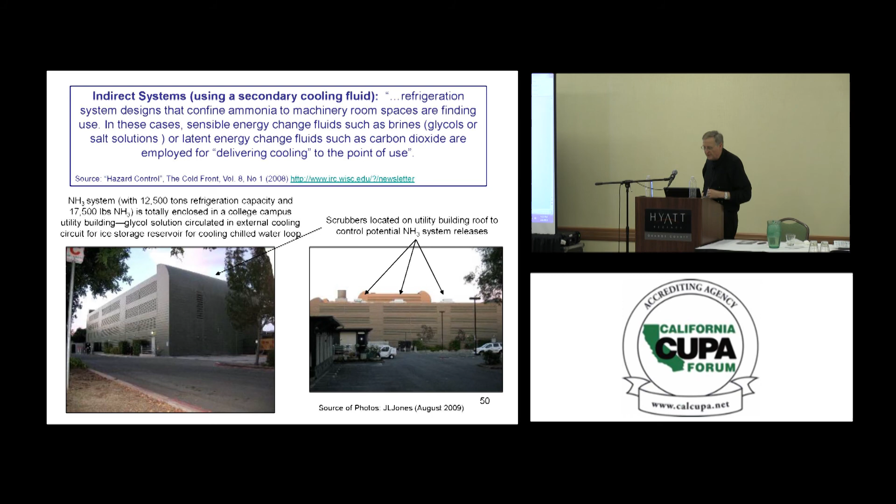Now I'm going to talk about ammonia refrigeration. I'll quickly go over some different options here. One of the risk-benefit trade-offs often made - where you can use anhydrous versus aqua ammonia - is in selective catalytic reduction for NOx control in combined cycle power plants firing with natural gas. Then you inject ammonia.

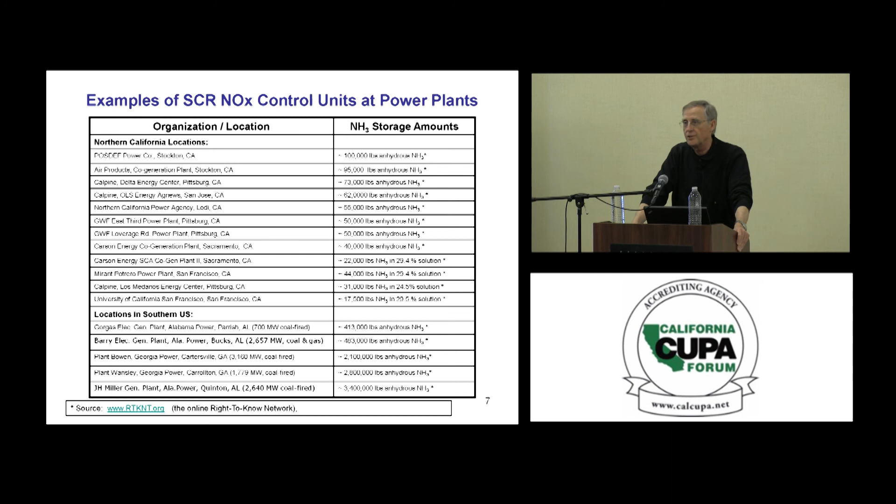You can also use urea, and here are some examples in California of selective catalytic reduction facilities for NOx control. You see quite a few of those that have anhydrous ammonia, but I've also put in some examples from other locations around the U.S. where they have up to 400,000 to 500,000 pounds of anhydrous ammonia in inventory at these first two plants in Alabama and this plant in Georgia.

A couple of them have 2 and 3 million pounds at these very large coal-fired plants. And pulp and paper - I'm just going to flash through these because they're not really relatively important for most of us in California.

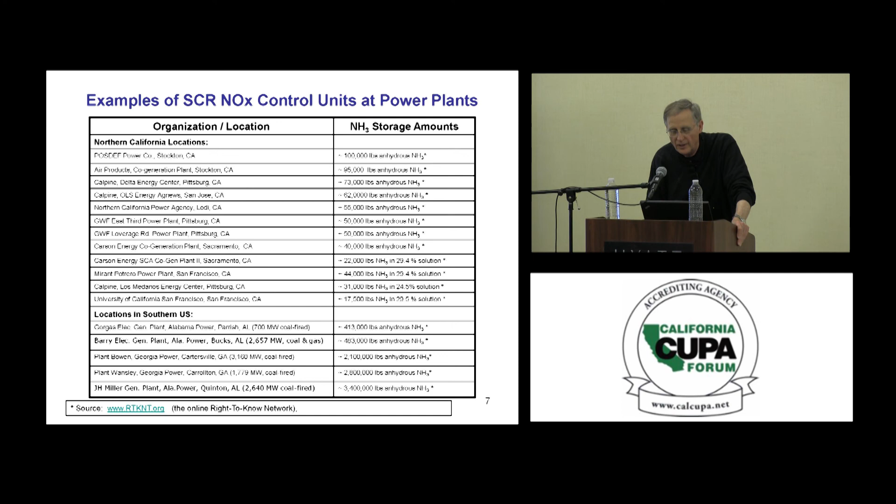For potable water treatment, we also use ammonia, and it's being replaced more frequently by aqua ammonia. This is used for chloramination - ammonia reacts with the chlorine species to form chloramines that are more chemically stable. Anhydrous or aqua ammonia may be used, and that's one of the ways to make it inherently safer - go to the aqua ammonia.

Semiconductor use, and light-emitting diodes - just a couple things that might be in your jurisdiction. In terms of light-emitting diodes, the inventory of ammonia is actually fairly large, over 100,000 pounds at one of the facilities in San Jose.

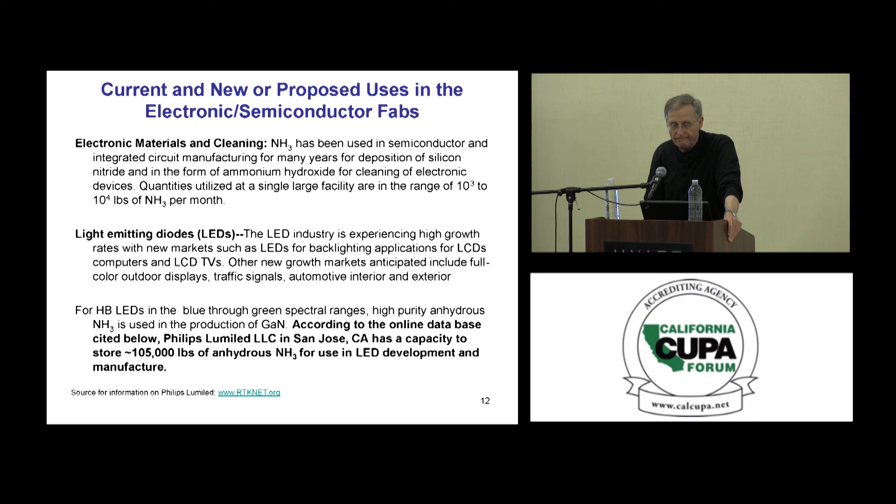Refrigeration. I'm going to flash through and let's just talk about it.

Refrigeration systems have a real good history. One of the oldest facilities in the world in terms of ammonia refrigeration in a major metropolitan area is the one at the Carlsberg Brewery in Copenhagen. They have a system containing over 150,000 pounds of ammonia, and they've had that in their inventory for the last 50 years in a population center of over 1 million people with almost no incidence of any significant releases.

A lot of good engineering controls. The point I want to make is these systems can be made to work very reliably for long periods of time if you have good engineering practices and good management system practices.

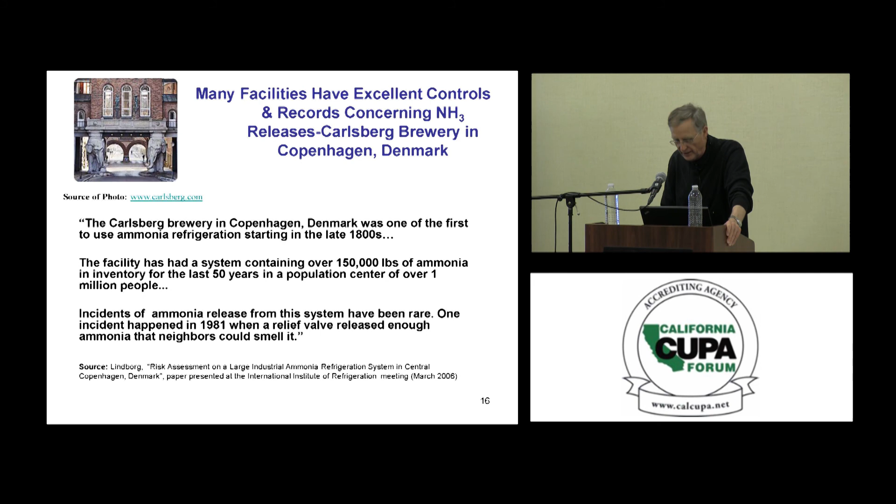When you're looking at ammonia refrigeration systems and vapor compression type refrigeration systems, you've got the high pressure side and the low pressure side, and the high temperature and low temperature side. I'm going to jump forward even farther because this is the part I said I would skip about why we're using ammonia. And these are some of the quantities.

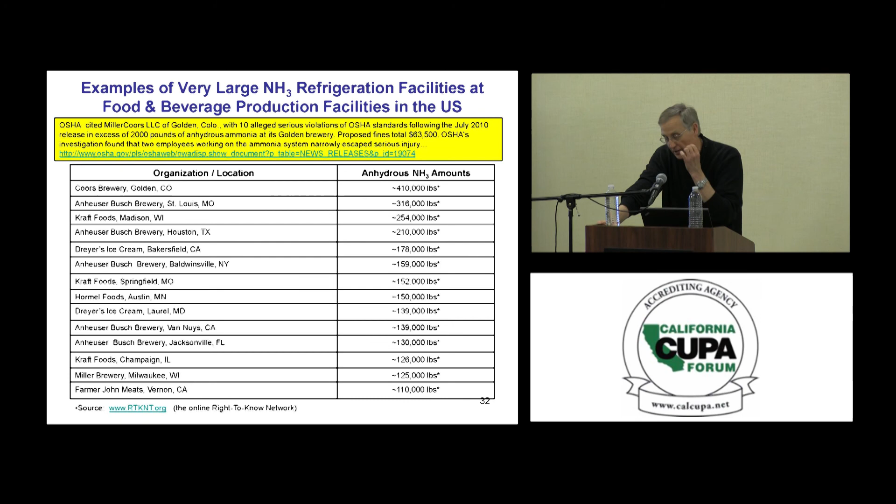In ammonia refrigeration systems in California, most of the systems are typically in the range - and I've got it in the appendix - from 10,000 to 150,000, 200,000 pounds. There are systems around the United States, though, that are in the range of 300,000 to 500,000 pounds. And again, for the most part, they operate very well.

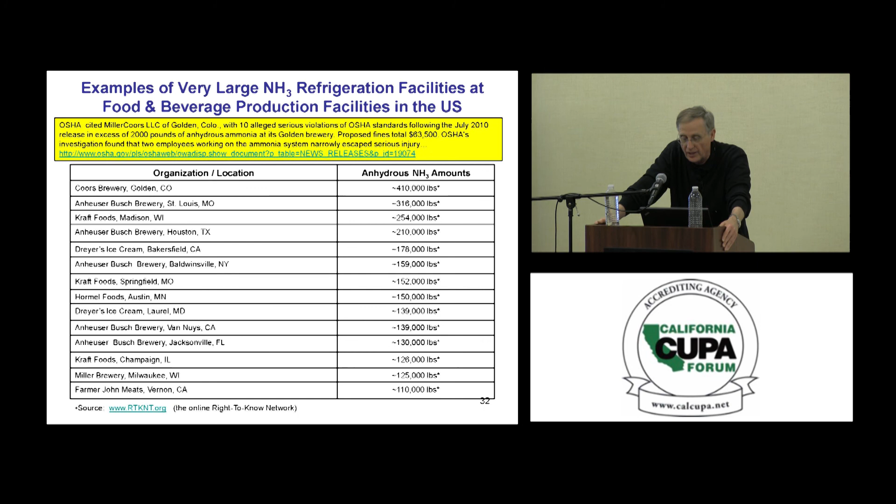There were some issues with Miller Coors, which happens to have the largest system, in 2010, where they released about 2,000 pounds. These releases tend to be much less than in the transportation area. There are a lot of controls that minimize the release, but 2,000 pounds of release into a building is still a big deal in terms of potential worker exposure.

Now, the high pressure side and the low pressure side, where the ammonia gets released in terms of consequence analysis - we're not going to have time today to go through all of that, and I'm going to put the slides in - but that determines what actually might happen in terms of the plume.

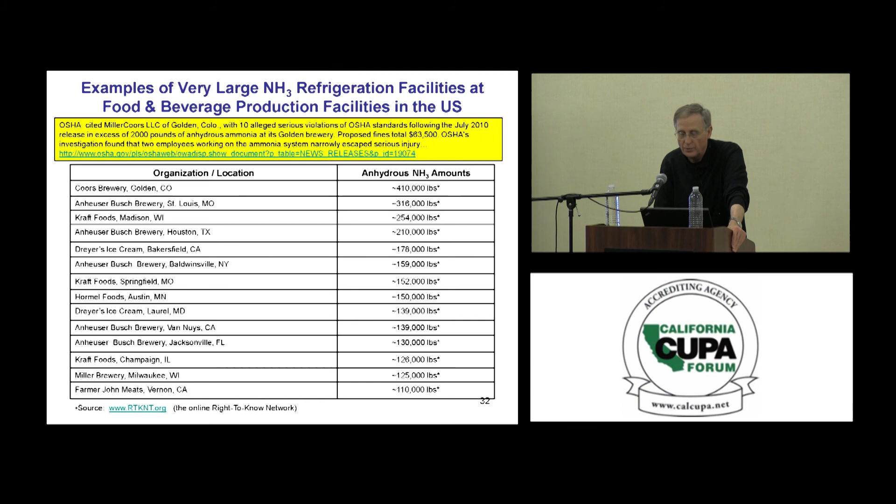If a leak occurs on the high pressure side, the conditions are going to be different than if you have a release on the cold side where you've got a cold liquid. And the response, in terms of the consequences and how you respond, might be different. I'm going to fly fast forward through some of these.

Let's talk about some of the releases, what some of the scenarios are and how releases occur. One of the things that has been done in many cases is to distribute and circulate the ammonia instead of through the building, on the rooftops, over the roof on external piping. Now this is good for potential worker exposure, but then you've got a release that would be outside.

Now there are two ways to get away from this. You can also use dual fluid systems. And I've got a lot of information which you can read in here, and I reference various reports.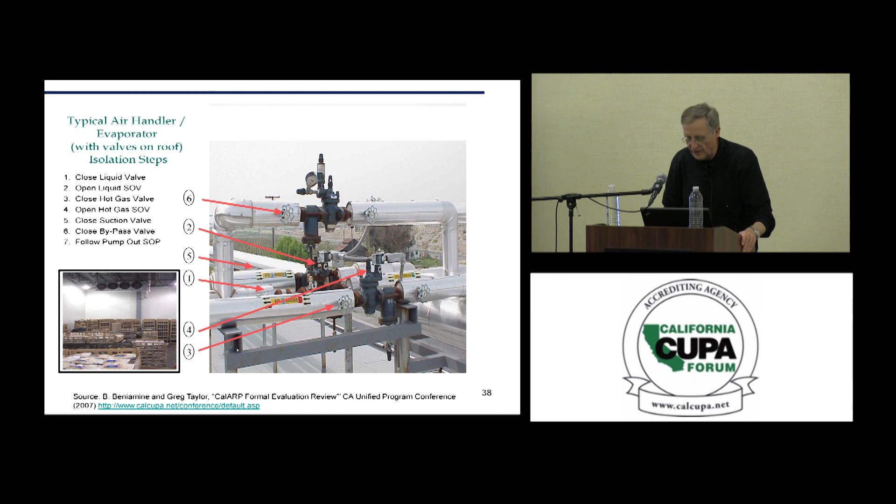Now, what can happen on some of these systems on the rooftop? Well, one of the things that happens with refrigeration systems is that sometimes you can have hydraulic shock. This is a report that came out of the Cold Front, a newsletter that you can get free online from the University of Wisconsin through the Industrial Refrigeration Consortium, and they show a picture of that.

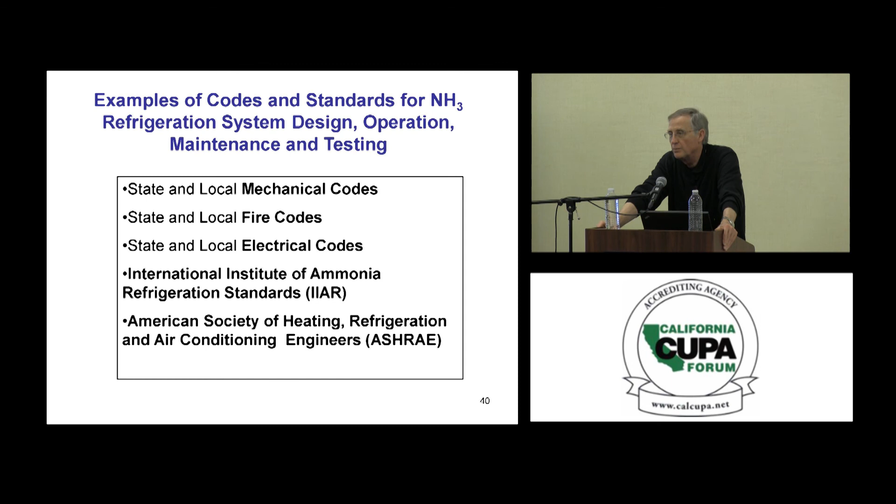Many codes and standards hopefully prevent those kinds of weaknesses in welds, and also operating procedures that will prevent those hydraulic shocks from occurring.

I've got a lot of information here that we're not going to be able to go over now. So one of the things you can do to reduce the hazards is to go to dual fluid systems.

Dual fluid systems are being used much more in non-food refrigeration plants, but they're also being tested and demonstrated. There's one in California, maybe a second also demonstrated, where you use ammonia as the basic system for doing the refrigeration. You have a secondary loop, and the secondary loop can use a brine solution or CO2, depending on the refrigeration demand. The reason I'm pointing out these dual fluid systems is we are going to see more ammonia refrigeration systems used in non-food and non-industrial applications.

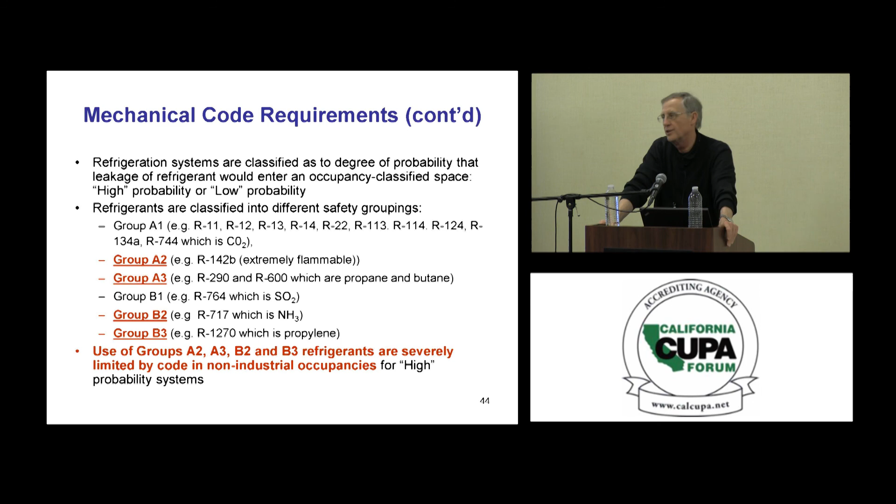I'm going to fast forward again and show this system happens to be in the middle of Stanford University. This is an ammonia refrigeration system, and they have a secondary loop. So the entire ammonia refrigeration system is within the machinery room. No ammonia leaves the machinery room.

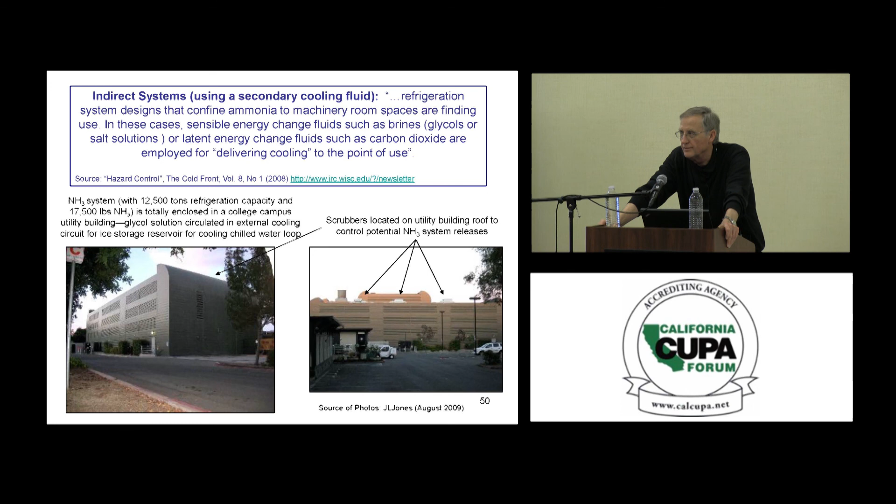If they have an event, I've shown the scrubbers on the roof. If they have a release, all of the ammonia is exhausted through the rooftop scrubbers and is scrubbed to well below the IDLH values, and with dissipation will be well below acceptable exposure limits, if the scrubbers work. So they've got to have a good mechanical integrity program, and I hope they do.

It's for circulating chilled water for building air conditioning, a campus-wide system. It's a district cooling and heating system they have essentially. And I'm going to fast forward again.

By the way, this is what happens when you take a liquefied gas and expose it to high temperature. They were doing maintenance on an ammonia refrigeration system in a synthetic rubber facility. This was an incident in 2008. They shut off the pressure relief system, probably to change out the valves, and they had ammonia in the system still.

And they put steam on the unit. It probably got up to—this vessel was code rated at probably 250, 300 psi. Based on the temperature, it probably didn't fail until it got up to 900 or 1,000. Mechanical engineers do a pretty good job with design, but not that good. And unfortunately, someone was killed.

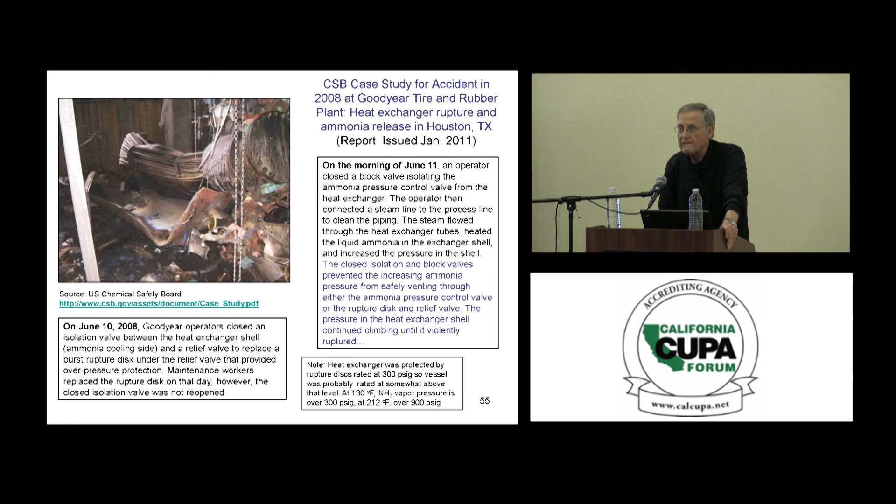The question is, why are they switching from Freon to ammonia? Because of ozone layer depletion. It's been mandated—we have to move away from Freon-based refrigerants, halogenated refrigerants, and many companies have decided that they're going to do that. Let's talk about where we have major refrigerants.

So this is a system in Fresno. It's a dual fluid system; you can read about that. In urban areas, how many of you think we've got ammonia refrigeration systems now in major urban areas? We do—somebody knows it. Let's look at a couple.

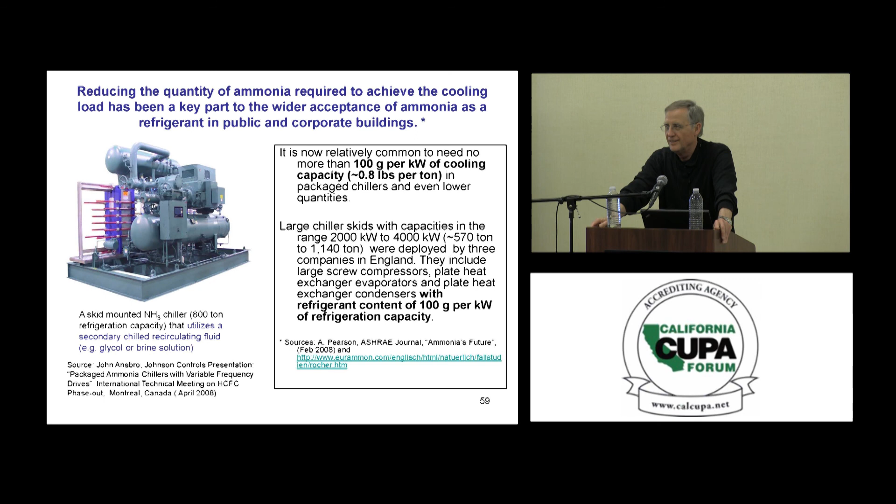Heathrow Airport in London just put in a major ammonia refrigeration system, again a dual fluid system. So the machine room is isolated and has controls if there's a release, and also these systems require a lot lower ammonia inventory because you've got a secondary heat transfer fluid being circulated throughout.

Many other parts of the world, including Chicago's McCormick Place, also have an ammonia refrigeration system, which I've visited and talked to them about. Very nice system with controls right near the loop in Chicago, with an inventory of 30,000 pounds of ammonia.

Aren't those less efficient than just the single loop? But much safer. Yeah, you never put a single fluid system in an urban area.

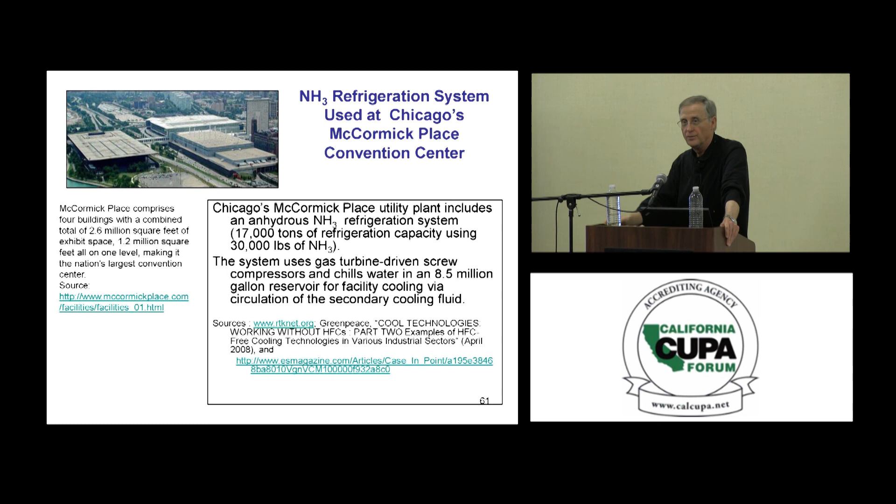Throughout much of Europe, here's a rooftop mounted unit right in the middle of London. We're going to see more ammonia refrigeration systems. You are going to see more ammonia refrigeration systems in your jurisdictions over the next 20 to 30 years in commercial and industrial applications, including conversion in Canada. There's a major activity underway across Europe to convert from Freon-based refrigeration systems to ammonia refrigeration systems for ice skating rinks and major ice skating arenas.

So we are at the end of our time. I only have another 2 or 3 hours to talk, but I'm going to cut it off. You'll see the slides when I post them. There's some ones on consequence analysis and using the ALOHA model. And you've got my email address if you've got questions. I hope you learned something.